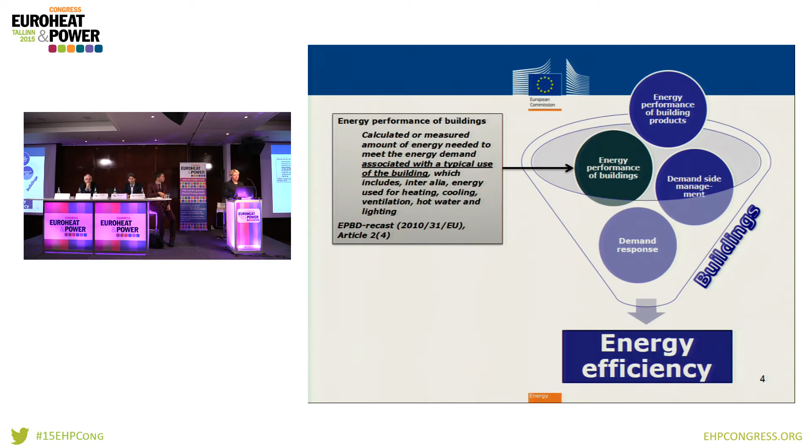We consider building efficiency in an integrated way. So we are looking at the performance of the building shell, the climate, the building envelope. We are looking at the performance of the building elements and technical building systems. And we also consider buildings in terms of their relationship with the surrounding energy system, and we promote demand response and demand side management for buildings.

So therefore, basically, all the specific energy efficiency legislation is applicable for buildings. The eco-design framework, for example, sets what are those products that are efficient in heating and cooling. Space heaters and water heaters are perhaps the most important products in that sense, or lighting appliances. But we set performance requirements for the entire building, building elements, and building units.

And in a more horizontal approach, the Energy Efficiency Directive requires that public buildings are renovated at 3% per year between 2014 and 2020. And it requires member states to also elaborate long-term building renovation strategies that would elevate the energy performance of individual buildings and building stocks to the level that has been defined in the Energy Performance of Buildings Directive. So the Energy Efficiency Directive and the EPBD are very closely related.

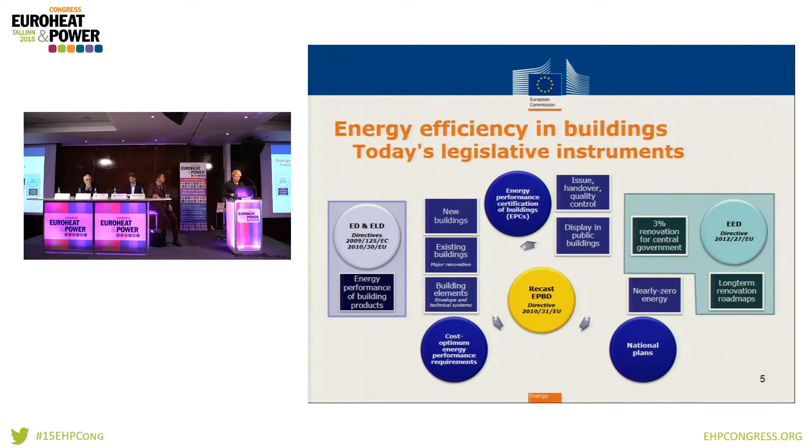So the EPBD is the main instrument specifically addressing building efficiency. And what are the key instruments? Member states have to set minimum energy performance standards for buildings, and these energy performance requirements should be reflected in building codes, in national and regional building codes.

There is an obligation to issue an energy performance certificate for buildings and to make this available when a building is constructed, sold, or rented out. So the new owner or the renter can see what the building or the building unit performance will be.

And there is the requirement to move towards the so-called nearly zero energy building standard, first in public buildings, starting from the beginning of 2019, and in the entire building stock, starting from the beginning of 2021. And this is underpinned by a benchmarking system to improve the level of ambition and keep it under review.

So the minimum performance requirements need to be reviewed after member states have calculated them using the methodology, the framework methodology that the Commission has set. They also have to review these performance requirements every 5 years.

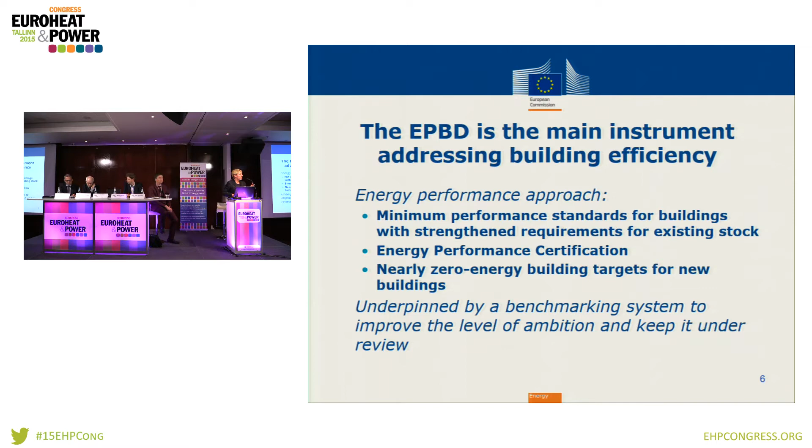It has taken a very long time to actually implement the basic requirements of the EPBD, which were already present in the 2002 version of the directive, meaning the energy performance requirements and the certificate system. And basically, it took 10 years to become almost standard practice for member states to issue energy performance certificates and to start integrating high energy performance building requirements into their building code.

But today this has become something natural for people who are buying or renting houses or apartments to look at the energy performance requirement, and we are quite proud that sometimes they don't even know that this is an EU requirement and that it originates from the EU. But it took a long time, at least 10 years, and we still are not fully finished with the implementation of either the first EPBD or the second EPBD.

But if we are looking at the impact, EPBD is really a success story. We can see that since the first directive, there is decreasing energy consumption in absolute and relative terms in building stocks. And now this is basically a fact of life that buildings, heating, cooling, and electricity systems are becoming more and more efficient.

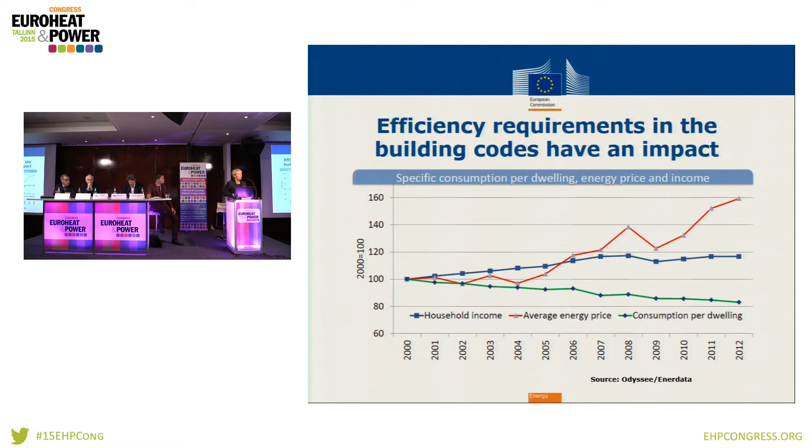Currently the implementation effort is focusing on whether member states have done their cost optimal calculation for setting minimum energy performance requirements, and if they have done it properly, which is a very detailed legal analysis that we are currently performing for the 28 member states, then whether these requirements are sufficiently reflected in their building codes.

And the difficulty with the building requirements is that in many member states, these are regional building requirements. So we also have to look at the regional level implementing measures and building codes.

There is also a big focus for us to make use of the European Structural and Investment Funds for building efficiency and especially refurbishment of the existing building stock, which is also a requirement in the directive that member states should use European funds and financial instruments to improve the efficiency of buildings in their territories.

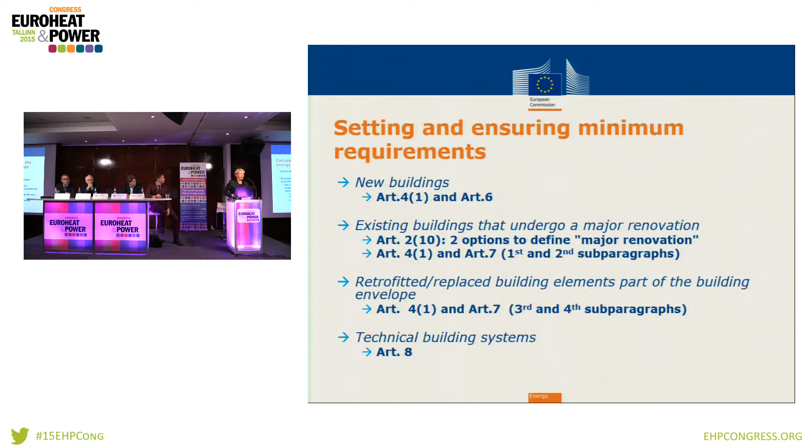The cost optimal level basically aims to ensure a high level of energy performance in the building. There is, as I said, a methodology how to do that, to take into account the savings that can be achieved in the buildings and then balance it with the cost. We have done an assessment of this, but a state of progress on the cost optimality requirement will come later, if I remember well.

As regards nearly zero energy buildings, member states had to submit their plans how to increase the share of nearly zero energy buildings in their building stocks. But first and foremost, they have to define what they mean by nearly zero energy building. There is a framework definition for that in the directive, that this is a very low energy consumption. The majority of this consumption should be covered by renewables.

But each and every member state will have their own specific nearly zero energy building definition that should include a numerical value. For example, how much kilowatt hour per square meter per year this building would consume. And also some sort of quantification of the share of the renewables in the supply of the remaining heat load in the buildings after they have been transformed into these low energy buildings.

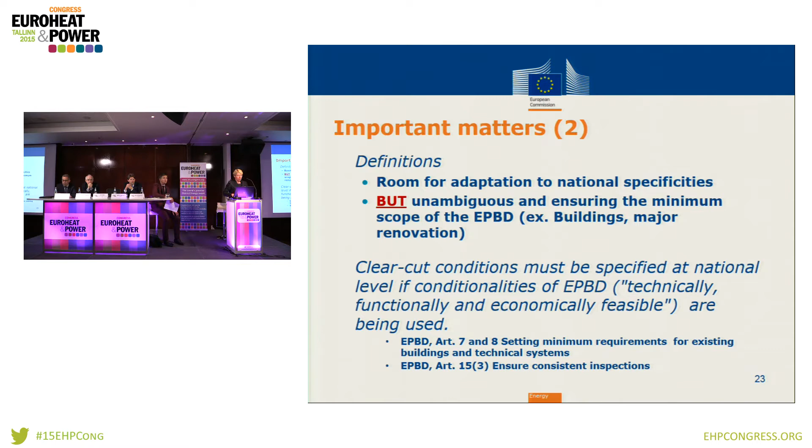As for the implementation, we will basically ensure that all shall obligations are implemented literally and in spirit by member states. We will accept flexibility, of course, in those requirements where member states may choose not to do it. But we will require very clear and concrete implementation measures. We will not lightly accept member states using the technically functional and economically feasible clause, which is included in some of the articles of the directive. We will ask them to explain what it means, when they consider the technically functional and economically feasible conditions are met or not met, and we are performing very detailed analytical and technical analysis on these buildings.

For the future, in 2016 we plan to review the energy performance of buildings directive, and in 2015, this year, to come out with the heating and cooling strategy. The heating and cooling strategy would set the direction for the EPBD review, which can include how to strengthen energy performance of buildings, whether energy performance certificates should include additional elements on renewables, smartness or district heating, how to ensure that renovation takes place, how to speed up the renovation rate, and other issues such as the urban dimension of building performance. The review will come out with concrete legal measures that may lead, if needed, to the recast of the current EPBD. Thank you.

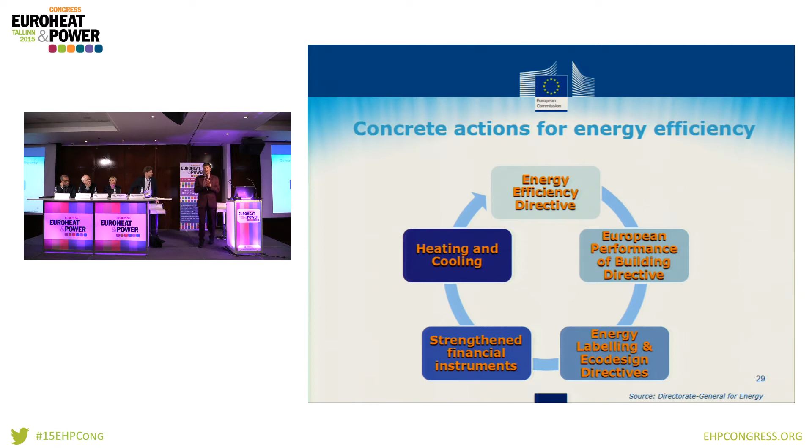Thank you, Niko. Ladies and gentlemen, before I start with the core of my presentation, which deals with primary energy factors, I want to talk about two aspects from the panel debate yesterday.

The first aspect is, I think it was Eva, you said that the European Parliament recognized the heating market as the Cinderella of the energy strategy. Was it you? Something like that. I like this picture very much, because who's Cinderella? We all know Cinderella as a dirty but hardworking, never complaining, very positive character, always honest and always kind. And we all love the moment when she falls in love with the prince. So using this childish metaphor, if the heating market is Cinderella, I'm wondering who's the prince? Okay, but another character better fits our industry. I'm a big fan of Tinkerbell from Peter Pan. She's much more like our industry, finding smart technical solutions, using things that other people throw away as waste, and making beautiful things out of it. So I think Tinkerbell should be our mascot. Okay, that's it for the metaphors.

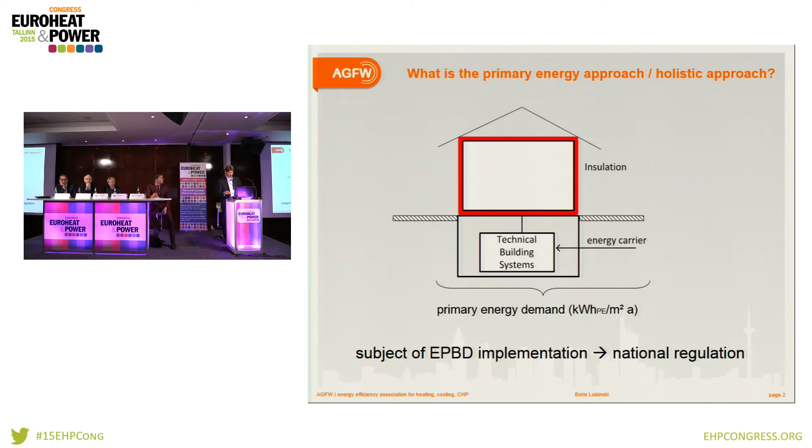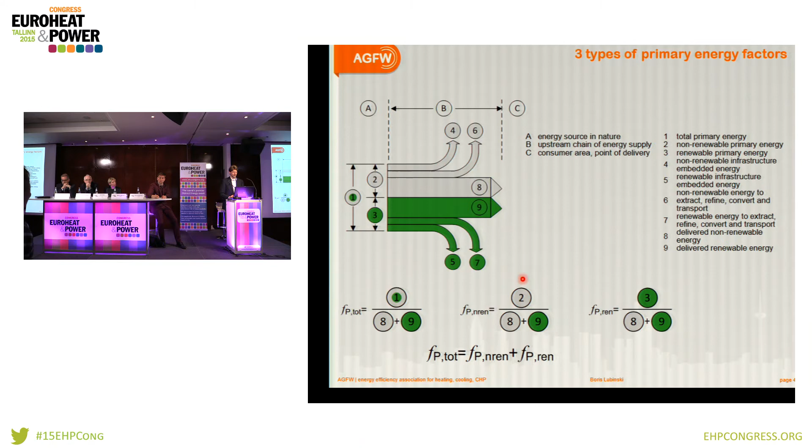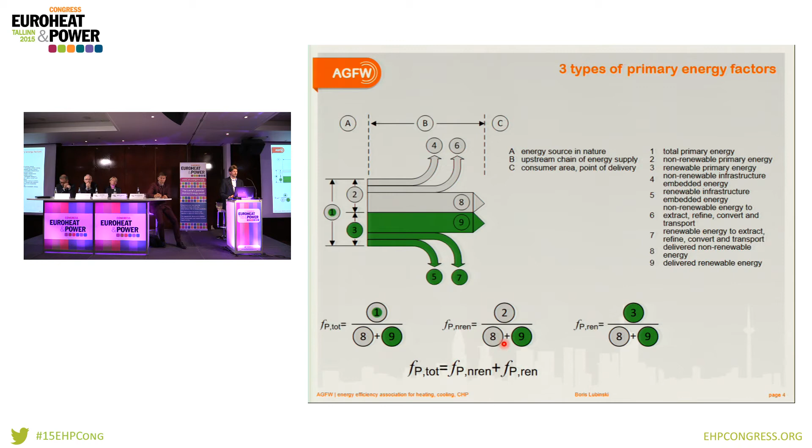Here, I take the whole primary energy. For the non-renewable primary energy, I exclude the renewable part. I only consider the non-renewable part, so the fossil part, the bad part, and put it into the numerator. And I can also, for the renewable primary energy factor, only take into account the renewable part. That's also possible. So it shows me that the total is always the sum of the non-renewable and the renewable primary energy factor. So these are the three types.

But this was for an energy carrier like wood pellets or any fuel. What's the primary energy factor of district heating? That's much more interesting for us as an industry. And this is quite simple. We have, again, the energy chain and the direction of the flow. So the primary energy in the source of nature, then processing like extraction, refining, transport. Then the fuel is delivered to a district heating plant. There it is converted into heat. And then by a district heating system, it's distributed. And then here again is the assessment boundary of the building where we deliver it.

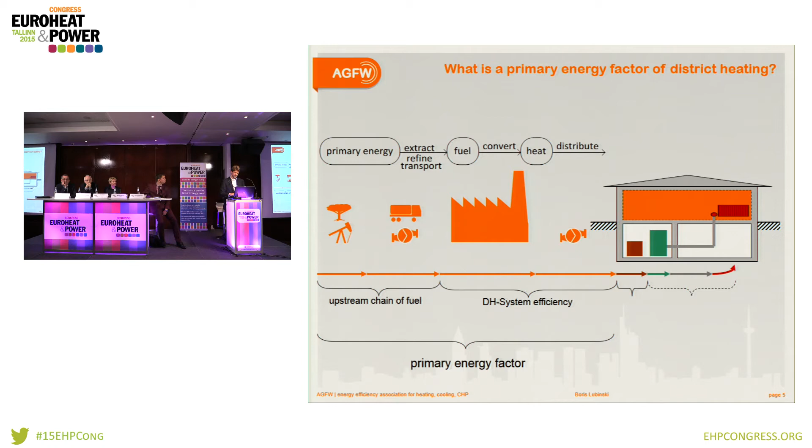And the primary energy factor of any district energy system is a composition of the upstream chain of the fuel and the system efficiency of our district heating system. It can also be district cooling, district electricity, whatever. And this brings me to the primary energy factor. So the calculation rules for the primary energy factor are subject of a European standard.

And the European standard has a basic principle. So we have, in principle, two options how to get to primary energy factors of district heating. Option one is the use of default values, like in this table. Option two is to calculate the primary energy factor with your system-specific data as input for the calculation. So let's talk first about the use of default values.

The use of default values is very valuable if you don't know everything about the district heating system. So you have a lack of information. In practice, we have it quite often that I don't know how much energy input was it, or how much heat did I sell to my customers. And for this purpose, lack of information, is option 1, the use of default values.

So let's go into this table. No. I need my laser pointer. There it is. Let's stick to the wood pellets.

Let's say we have wood pellets and burn it in a boiler without CHP, just to keep it simple. So I again go to my solid biofuel that I already know and go into this section of the table and see heat from boilers. There's always also a section heat from CHP, but I go to heat from boilers because that's all I know about my district energy system.

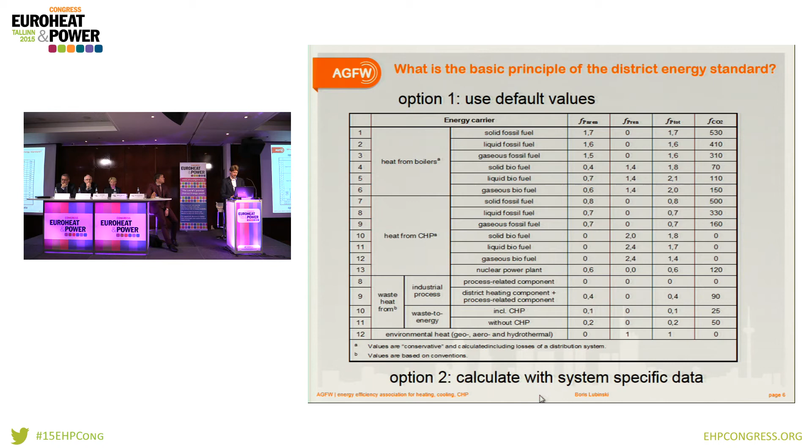And if you don't feel comfortable with the figures, like for example, okay, 0.4 is not good enough for my customers, you can choose the second option and go to the calculation. And then, of course, you need to know the energy data of primary energy input and output. And this is shown in the next slide.

So what is the basic principle of the calculation? It's also quite simple. We regard the district heating system as a black box. And the black box means I don't ask what's really inside there and what energy flows are inside the black box. I only have to know which energy flows cross my system border. And the system borders are usually defined by energy meters. So that's what I have to know. And then again, I make a simple ratio of primary energy input and delivered heat, and the result is my primary energy factor of my district heating. That's all.

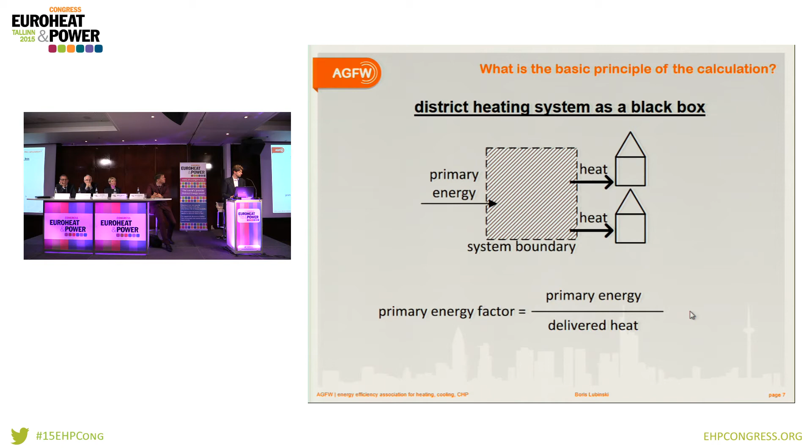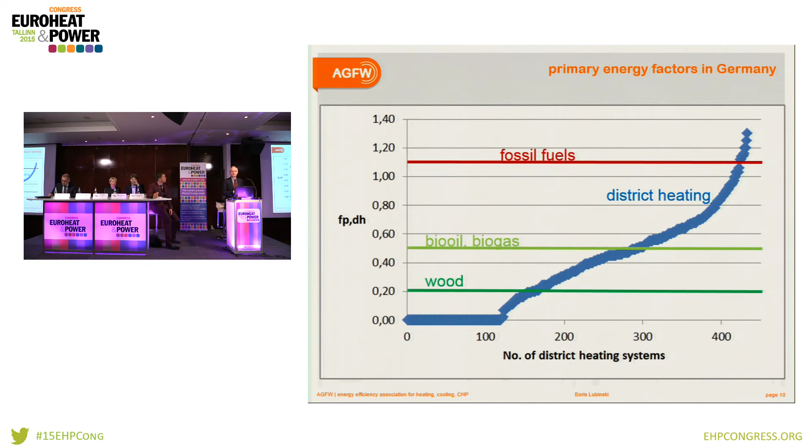Thanks very much, Niko, and good afternoon, everybody. Now then, let's get to the right slide. I'm as poor as you are with the computers, but I try. Oh, yeah, okay.

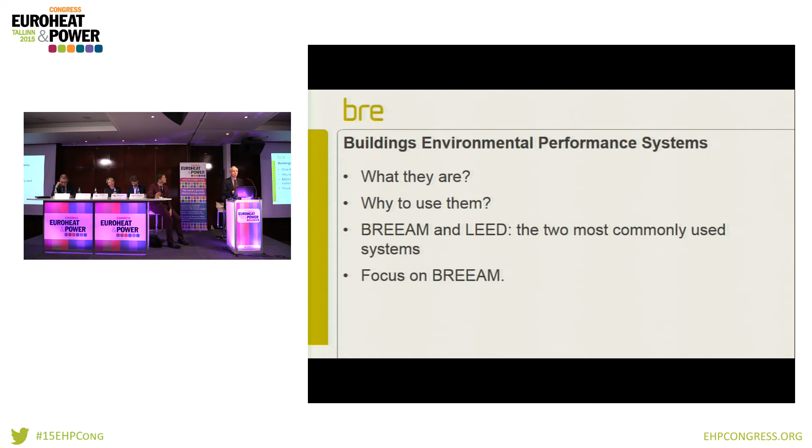So, in terms of a building's environmental performance systems, what are they? Why should we use them? We hear these terms BREEAM and LEED most commonly when buildings' environmental performance systems are being spoken about. I am from BRE, so I am going to talk most about BREEAM because, well, for obvious reasons.

If we then look at the whys and wherefores, the fact is that the environmental rating of buildings is growing rapidly. And yes, it is voluntary, sort of, depending where you are, because, and of course I am talking mostly from the UK perspective, certainly in the UK, increasingly planners are insisting on high efficiency buildings, and so certain BREEAM ratings can actually be predicated if a developer wants to basically develop within a particular town or city.

The rating of buildings enables hidden elements to be credited. So looking at something like district heating, it's obviously less visible than something like photovoltaics. So this can work to the advantage of district heating, that it can be credited.

Also, at the same time, although these things are, as I say, on paper voluntary, but kind of in the UK, not always, there are other motivations why people have in the past gone for some rating system. For example, undoubtedly getting a good rating is a way of demonstrating your green credentials, and some companies, particularly maybe the blue chip ones, are very much wanting to do that, and it also arguably raises the asset value.

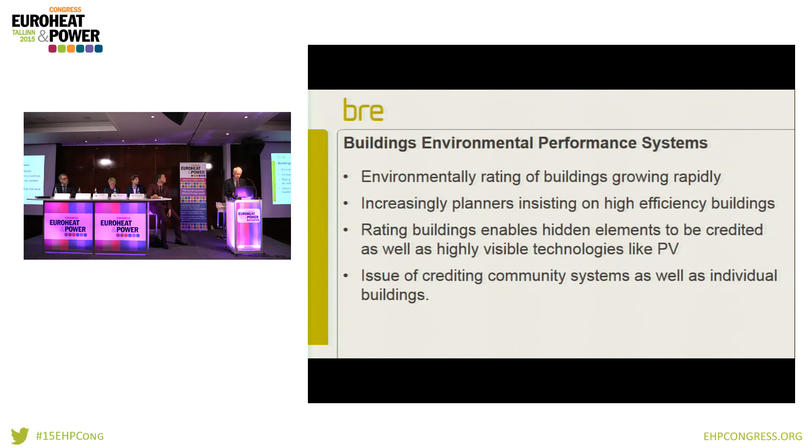So which one to use? We all, I think, have heard of BREEAM and LEED, and there are certainly others, but those are the two most commonly used systems. I think I could say confidently that the right decision on this can help to focus and to ultimately end up with a better design and quality of building, and therefore also benefit the future occupants.

But as to which one you should use, it's, I suppose, a strange question for somebody from BRE to answer. And I'm going to essentially say that both BREEAM International and LEED US claim global applicability, and that both of them, in doing so, defer to local regulations, guidance, and standards.

And following on from that, there has been analysis done, certainly in the UK, maybe elsewhere, to take a look at the two systems. It shows considerable overlap, actually, one analysis showing about 50% commonality. And indeed, if a building scores well with BREEAM, it's probably also going to do well with LEED. I would say that BREEAM targets are often quite technology specific. LEED targets leave it more to designer discretion.

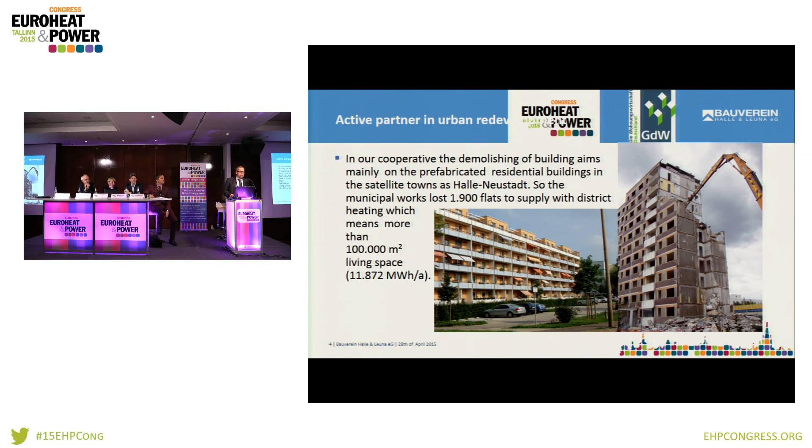And when we demolished these buildings, this means, on the other hand, the loss of supply of more than 100,000 square meters living space, and all of these square meters were supplied by district heating. And that means, to give you a yearly amount of the heating demand, it's nearly 12,000 megawatt hours a year. And that's quite a lot.

What's the principal advantage and challenge of district heating? In my opinion, the principal advantage is no air pollution at the place of delivery and consumption of the heat. And the cogeneration, we already heard about it, with the carbon dioxide reduction, which is essential for new building standards and the higher KfW. KfW is the development bank in Germany, subsidies for energy-related modernization.

Due to the historical evolution of city development, the former GDR, where we have our flats, is still better supplied with district heating systems. According to the already mentioned GdW, 3/4 of all residential buildings of housing companies in the former GDR use district heating. They're absolutely used to it, while less than 1/3 uses district heating in the former Western Germany.

That's quite a difference. So in the former GDR, there are absolutely very strong ties between housing companies and usually the municipal works, which delivers the district heating. And the challenge for both of us is the shrinking number of houses and, on the other hand, the higher efficiency of the remaining buildings due to the refurbishment of these buildings. Both result in a significant loss of consumption.

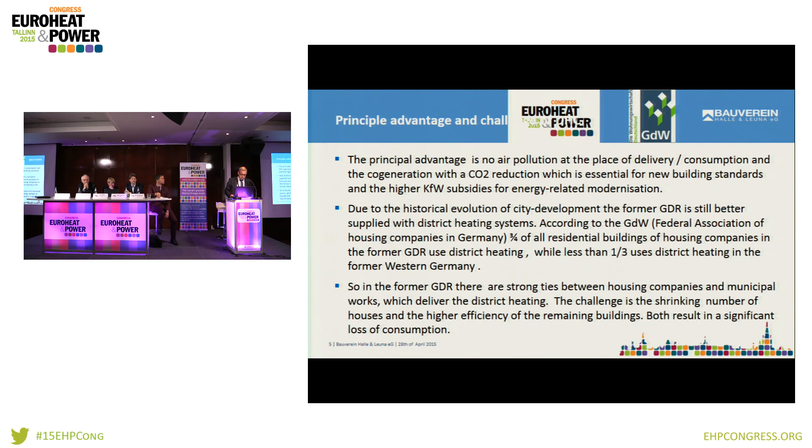Housing cooperatives have to face the discussion of sustainability in Germany and in general are forced to lower their energy consumption. Energy system transformation goals in Germany are, for example, up to 2020 to lower 20% of heat requirement and up to 2050 climate neutral. This means a decrease of 80% primary energy consumption up to this time. And we will only manage these high goals if we double the energetic modernization in our residential buildings from 1% per year up to 2% per year.

And as I already mentioned, big goals need a strong partnership, and these are indeed big goals, especially for the housing companies in Germany. And in the satellite towns of Halle, district heating is widely spread. Nearly 100% of the residential buildings are supplied by district heating. And on the other hand, a lot of these buildings still need a refurbishment. And so we will lose again the demand of district heating.

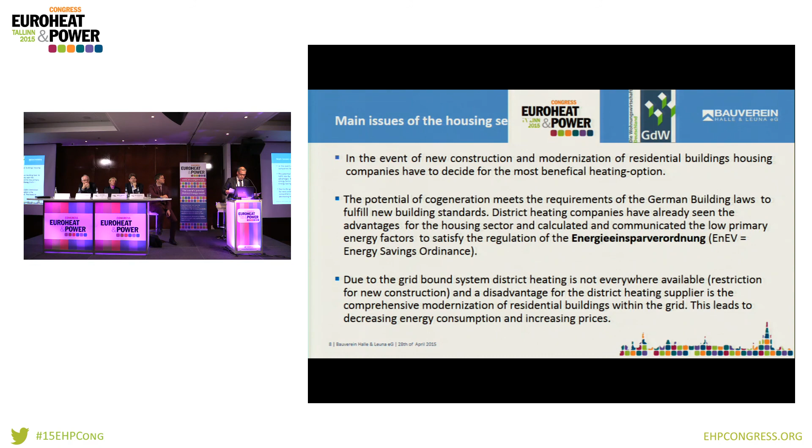In German cities, municipal works often use district heating priority statutes to prevent an economic dilemma: grid-bound systems and the security of investment on the one hand, and fair and functional competition in supplying heat for the housing sector on the other hand. Even in Halle, the municipal works use such a district heating priority statute, and I think it's not the way for the future, because the housing sector aims for a more flexible and affordable solution.

I want to remember that district heating is a highly esteemed supply system. A permanent threat is increasing prices due to the modernization of buildings or the shrinking number of buildings to supply. Super important will be the combination of grid-bound systems and local systems for heat supply. Both must not compete, but should be a potential market of the future for the district heating suppliers.